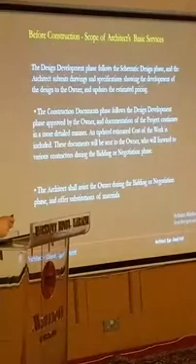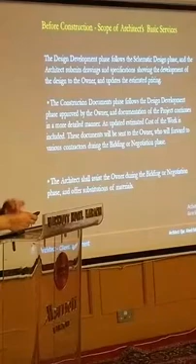So basically, in your next phases, you have design development, you go for approval, documentation in a more detailed manner, and updated estimate cost of the work.

Now this is also a thing - everybody asks for cost of work. We have a very poor system of costing. Maybe big organizations like us have a big costing department and QSs and whatever. In the US and in Europe, the QS is on the job on day one.

On day one with the architect. Here, after you've done all your thing, you've done your BOQ, you've done everything, you give him a document and say, okay, cost this for me. So we are not at par with the world. You need to see that.

So you have construction documents, whatever. You have to help out during negotiation - these are routine stuff. Now, during construction, it's very important that you're not party to the construction contract. The construction contract is between owner and contractor.

You may be given a portion where they say, this guy will oversee my work. That's an authority given to you. The contract isn't worded that way, but if you look at contracts, they say the engineer will do this. Basically, that's something the owner is giving you as an authority.

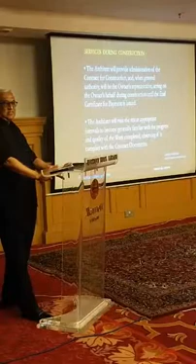Now let's counter that also. So we said 2000 psi with a minimum mix of 1:3:6. Very localized to the country, and similar for different mixes or whatever. So we are still going through that. Even today, you talk to structural engineers, you talk to everybody, you're still talking of mix.

Nobody talks of mix anymore, you talk of design strength. So the ethics works down the line. The labs have to be right, they have to be honest, we have to be honest, the contractor has to be honest, whatever. So somehow we're a bunch of crooks here, whatever.

This is one of the most important clauses that a majority of architects don't include. The architect shall not be responsible for the contractor's operational methods, techniques, sequence of procedure, nor for the safety precautions in connection with the work, nor for any failure of the contractor.

Now, safety precaution: the guy fell down the ladder, the guy fell down from something, and they lock up the architect. If you had that written in... and let me tell you, the people involved on that project did not have this clause. They said, shit, yeah, we should have had this clause in the contract. They didn't. It's a very major clause.

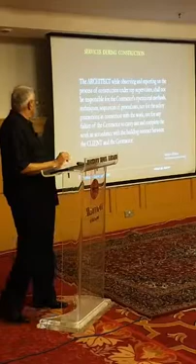Nor for the safety. You cannot tell a contractor which side to start from. You can't.

If you tell him, you say, you did my job, I wanted to start from this end, you told me to start from this end, therefore I can't perform. My end result will not happen, I cannot give you in the required time, blah blah blah, and all that. So you cannot interfere.

It's like, somebody said, one of our projects, there were a lot of piles there. This guy said, the area is so big, bring bulldozers to remove the earth. They didn't. They got 300 real donkeys, and these donkeys would come down, pick up the earth, go back up, pick up the earth, and they were so beautifully trained that they would go down and come up without any guidance.

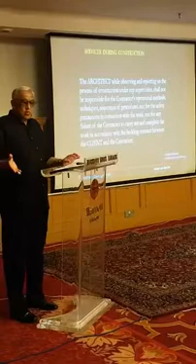Why was that, and why did we allow it? Because the bulldozer couldn't get between the piles, it would keep hitting the piles. So there was so little space that only the animals could go in there. So it happens, you learn this over time.

All I'm saying is, this is one of the most important things you must have in your agreement. Now the contractor is failing to perform on time, so they say you are the architect, you know, or the designer knows, you both are there, you people are not performing.

The contractor has his own contract. He has his own performance bonds, I won't even talk about that right now. And he's supposed to perform according to that. So how come you are involved in it? He has signed a contract to do something. How are you responsible for his failure?

This is what you have to fight. It's very important for you to fight this in all your contracts. Now I talked about reporting earlier.

Being informed of the progress is not responsible again, but remember, you report. Today's world, verbal means nothing. Verbal means nothing, like saying I told you so. I told the guy who was at site - that means nothing anymore.

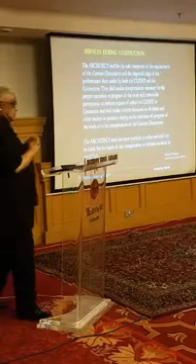Now the other is also a very important thing. Contract with regard - this is not done here, this is not done there, or whatever - you must write in this to be the sole interpreter of the requirements of the contract document. If you don't take that authority, somebody else will. You will say what is right. Declare it on day one.

You have to learn to establish your power. One of my partners at SOM used to say we would go to a project site for the first time and reject the pour, right or wrong, we'd reject it. He says, why? To establish power. You establish that you will do what I tell you.

It happens, there's a lot of power games. On any site, remember that, a contractor will be testing you for the first 3 months to see how pliable this architect is - how much can I pressure him, how much can I get away with - he keeps testing that. And you have to be very careful about that.

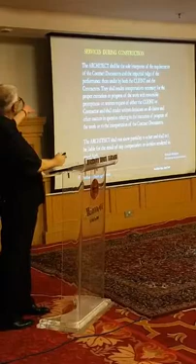Okay, but of course, after you interpret, then you claim. A client once told me, what is this, you gave this decision in favor of the contractor. So I said, I'm very sorry, but during a contract, I have to be fair. You may have hired me, but that doesn't mean I'm going to only give decisions in your favor. I have to be fair. And I actually fought for this, and clients had to agree.

But you should not show partiality, okay? Usual stuff - payments, whatever.

Now the thing is, during the project, what are your rights? What are your rights, what are your authorities? What happens if the contractor is not paying his subcontractors, what happens, what do you do in these cases? They'll say, I'll do the work, if he pays me I'll do it, otherwise I won't, and your project suffers.

So you must have the authority to say, hey man, I'm going to take that money from you, I'm going to pay this guy directly, I have to get my job done. You need to get your job done. You need to be the leader.

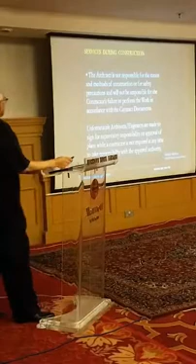What do you do? So you become a party to it. So all you will do is pay the insurance companies a lot of money for your liability insurance. Okay, so I'll just review this.

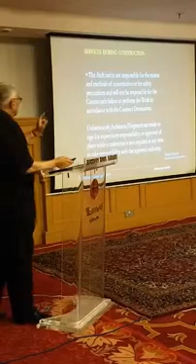The supervised responsibility, approval of plans, contractor is not required - this is something that I really would like you guys to note. Then you will do closeouts.

So you may have a limitation on authority. There's actual authority, there's implied authority, and there's apparent authority. Actual authority, implied authority means it allows the exercise of authority incidental to his actual authority.

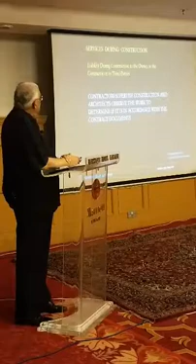Contractors supervise construction and architects observe the work to determine if it is in accordance with the contract document. That is going to be your argument at all times. I'm not hitting the nail for you. Alright?

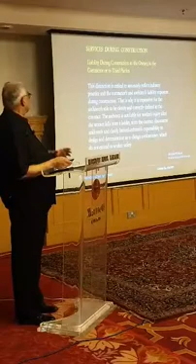It's very important to make this distinction, important for the architect's role to be clearly and correctly defined in the contract. The architect is not liable for workers' injuries after a worker falls from a ladder, since the contract documents uniformly and clearly limited the architect's responsibility. So please write this down in your contract.

I know three architects who didn't write this down and were held responsible. Most owners will accept the design intent, but if failures occur, they'll get you. They will not leave you alone due to errors and omissions, and we looked at a lot of those earlier. Most damages are due to failure of architect-specified materials and processes of construction, which can be traced either to the architect's own knowledge or the people on field and their quality of education, which is lacking in today's architectural education that tends to concentrate on design and not construction.

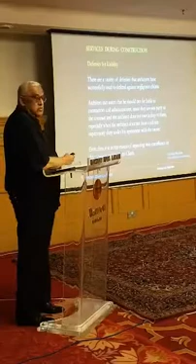So what are your defenses? Your defenses are you buy liability insurance. It's available here, but it's very expensive. Wherever we have been asked for insurance, we ask the client to pay for it.

What is the extent? If you look at the PEC Act, how long are you responsible? It's very clearly, very easily said, you're only responsible for one year, and that's it.

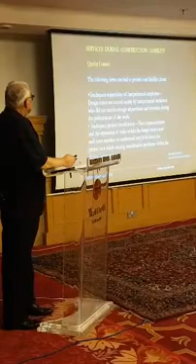So what can lead to liability claims? Inadequate supervision of inexperienced employees, meaning people on site can't see issues. Design errors are caused mainly by inexperienced architects who did not receive enough supervision and direction during the performance of the work.

Inadequate project coordination is a very, very big factor in failures. Poor communication - what happens? You do your architecture drawing, send it to all the trades, they just do their thing and come back. No, you must sit and bring everybody together as an architect. Very important.

Inadequate design coordination - sometimes there are requests to make a lot of changes within an unreasonable time frame, like 'just do this for me, I need this and that.' Very common, and that tends to make downstream errors also. Many times people say, 'just send it out, they're asking for it urgently.' What we realize is that nine or ten out of ten times it works out, but the one time they hit you, they hold you for it.

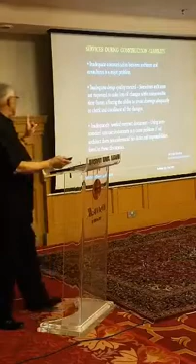Inadequately worded contracts - using non-standard contracts. Use standard contracts. PEC has good contracts; they've taken them from FIDIC and such. Consulting engineer and consulting architect contracts are not that very different at all. We pretend we are the leaders, but you know.

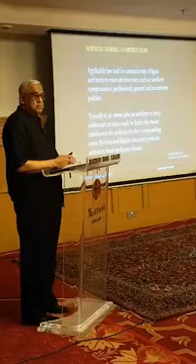So you maintain insurance, additional insurance, to reimburse the architect. In fact, if a contractor's issue arises, in the developed world they actually make the contractor pay for the architect's time also. Here, we take everything upon ourselves.

Remember, architects provide services, not products. Very, very important. So even when exercising reasonable judgment, an architect can be wrong. The industry, the salesman, wants to sell his stuff, so he tells you something. But unfortunately, buildings cannot be pre-tested and guaranteed that they will work as planned. It's a fact of life.

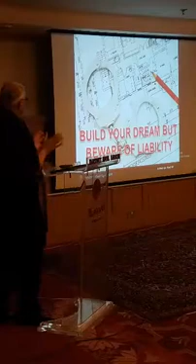So build your dream, but beware of liability. A final word of warning. I think it's important now, if there are any questions, that we can go on with that.

How many are asleep? Yeah, sure. Oh, yeah.

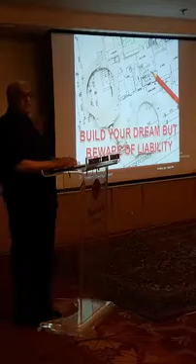Very good presentation. It's very enlightening to know about. Do you have a mic for him?

A very good question. The other thing is, if the premium has to be paid by the employer or the client for professional indemnity insurance, then why, over 4 or 5 decades of practice here, is it not that popular or advocated by architectural practices, because that financial part goes towards the client?

Look, eventually at the end of the day, everything has to be paid by the client because that's part of the project cost. If you go to Korea, all insurance is done by the owner, because they want the protection of the project.